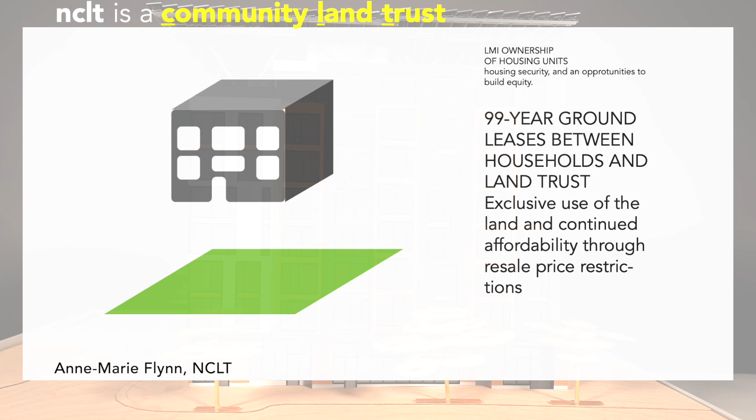NCLT has incubated, provided, and supported permanently affordable housing since 1973. We are a community land trust that owns the land under housing and leases the land back to housing projects. This allows households to build equity and protects them from speculation.

Recognizing that housing security stabilizes households and communities, we envision a world that everyone has affordable, stable, and sustainable places to live. This value is embodied in the 21 different projects across the Bay Area.

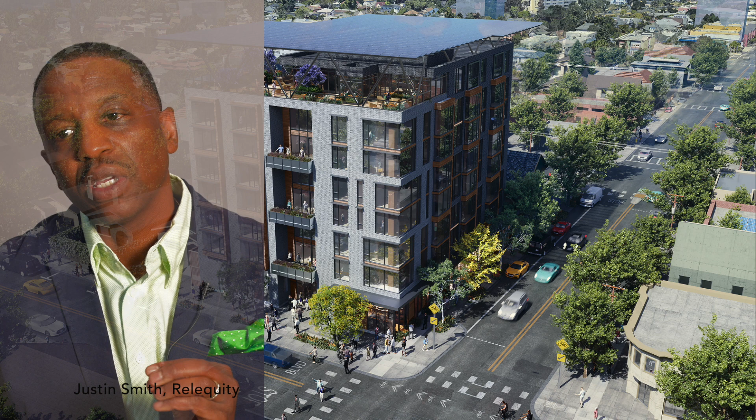Multiple sustainable technologies will be integrated at Woolsey Gardens, including a net zero energy solar microgrid, innovative mechanical and plumbing systems, mass timber construction, and a collaborative energy reduction program.

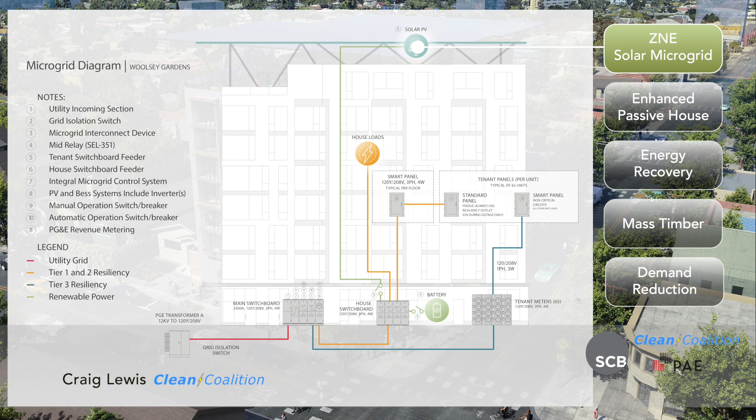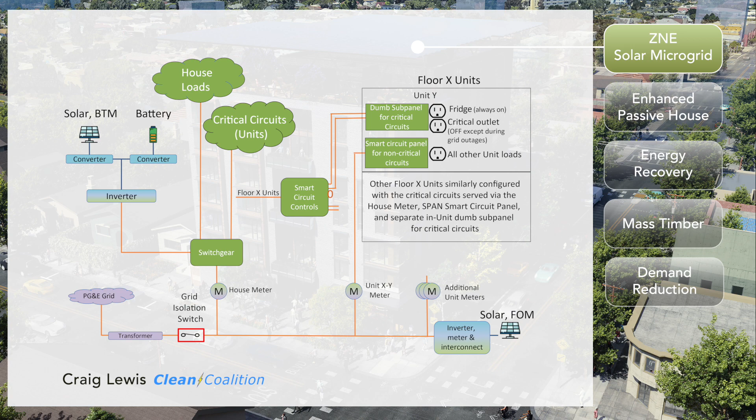The Woolsey Gardens solar microgrid goes beyond net zero, meaning we will produce more solar than we consume energy on site. The solar microgrid will also deliver grid optimal performance, meaning we will never pull energy from the grid between 4 and 9 p.m. peak periods.

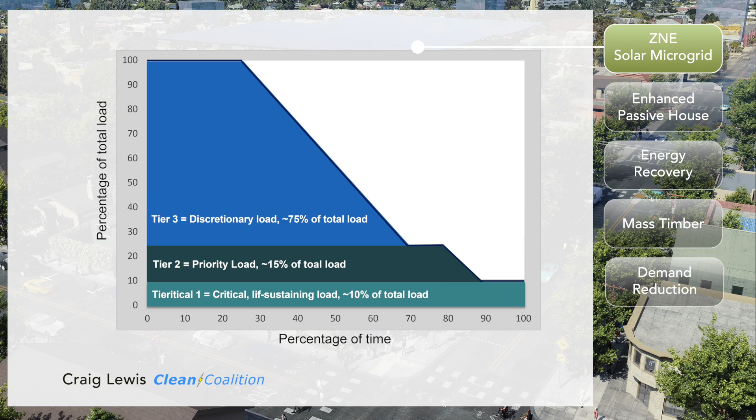And the solar microgrid will provide tier 1, 2, 3 levels of resilience. So when the grid goes down, no matter for how long, the critical loads will never turn off, and the rest of the loads will be supported for significant percentages of time.

Our starting point for the design of the building's HVAC systems was to optimize the building's passive environmental control elements. This included a high-performance building envelope, solar shading, and operable windows to provide natural ventilation.

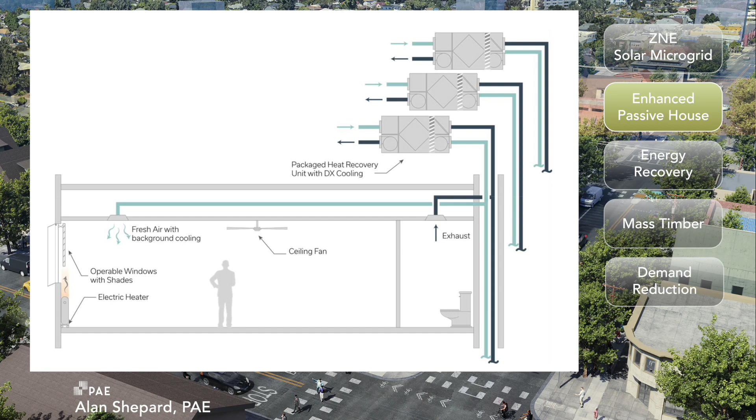This approach has enabled us to reduce the capacity and complexity of the mechanical systems, to make those systems simple and inexpensive to maintain, to deliver high-quality internal environments, and to do all of that with very high levels of energy efficiency.

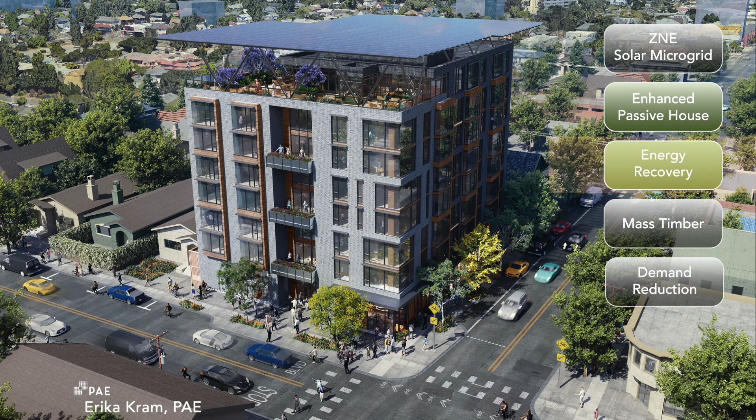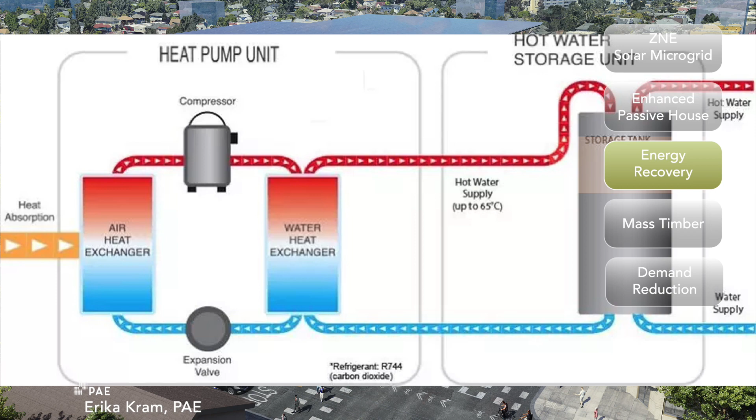The sustainable elements of the domestic hot water system consist of CO2 air source heat pumps, which are more efficient and have less global warming potential than traditional heat pumps. Additional hot water storage is provided for load shifting to ensure that the heat pumps are not activated during the 4 to 9 p.m. peak usage hours.

And lastly, cold water supply to the heat pumps is preheated through waste heat recovery coils, which reduces the overall electrical demand of the hot water equipment.

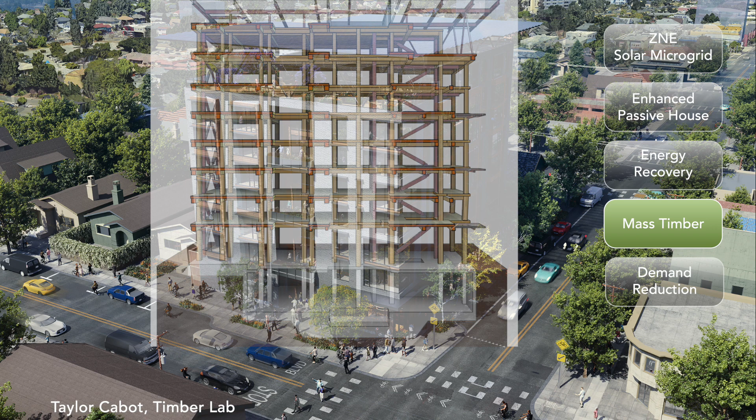The Woolsey Gardens project utilizes glulam columns and beams for the vertical structure and cross-laminated timber panels for the floor systems. The structure will require 46,000 cubic feet of timber, which will be used in place of steel and concrete, and is estimated to sequester over 1,300 tons of carbon.

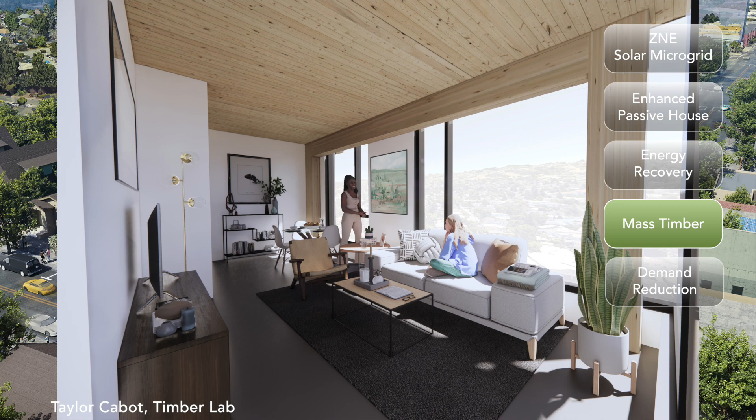The timber will come from forests located in the Pacific Northwest. We see this project as a trailblazer, as one of the first fully exposed mass timber 8-story structures in California.

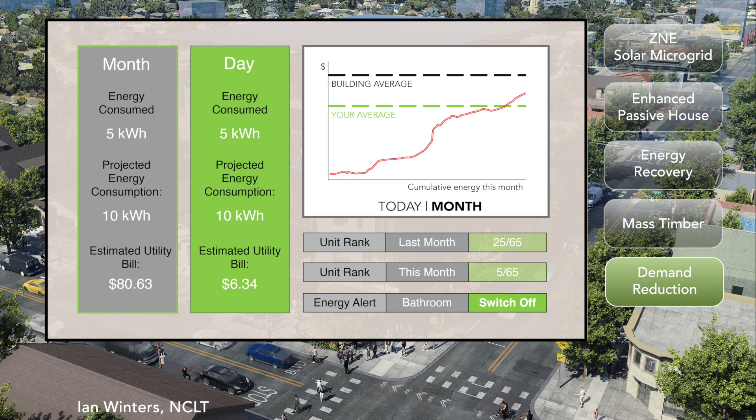NCLT and its partners will provide regular workshops, incentive programs, and hardware devices in each unit so that each household is an intentional partner in meeting the building's ambitious zero net energy goal.

Importantly, we believe that this is the first project in the U.S. harnessing all of these technologies simultaneously in a low-income homeownership situation, wherein the residents will be able to lower bills, reduce their carbon footprint, and improve the health outcome for themselves and their future families.

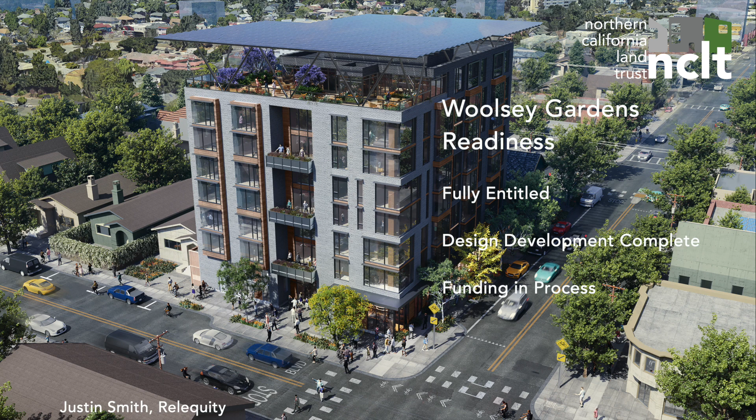With support through the CEC, the City of Berkeley, and the greater community, we expect to be in construction in 2024. Woolsey Gardens works on a small urban infill site, similar to many in the California East Bay Area. We are incorporating replicable building tools such as mass timber. Also note, the entitlement process uses a replicable method known as SB 35.

I am NCLT. I am NCLT. We are NCLT. I am NCLT.